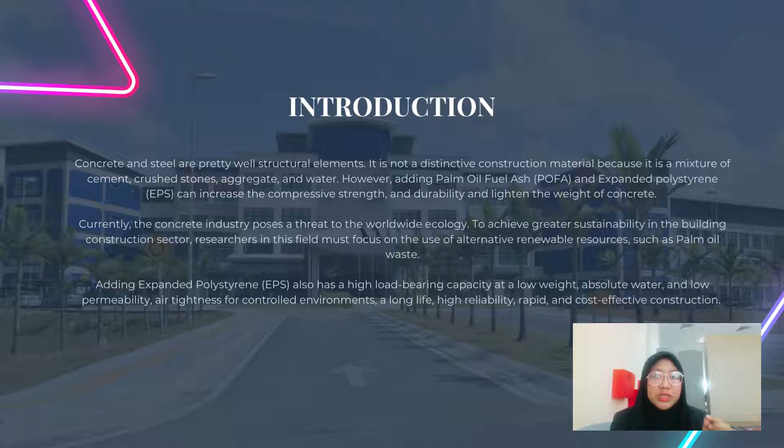Alright, for the introduction, first, concrete and steel are a pretty well structural elements. It is not a distinctive construction material because it is a mixture of cement, crushed stone, aggregate, and water. However, adding palm oil fuel ash POFA and expanded polystyrene EPS can increase the compressive strength and durability and lighten the weight of the concrete.

Currently, the concrete industry poses a threat to the worldwide ecology. To achieve greater sustainability in the building construction sector, researchers in this field must focus on the use of alternative renewable resources, such as palm oil waste. And adding expanded polystyrene EPS also has a high load bearing capacity at a low weight, absolute water, and low permeability, air tightness for controlled environment, a long life, high reliability, rapid and cost-effective construction.

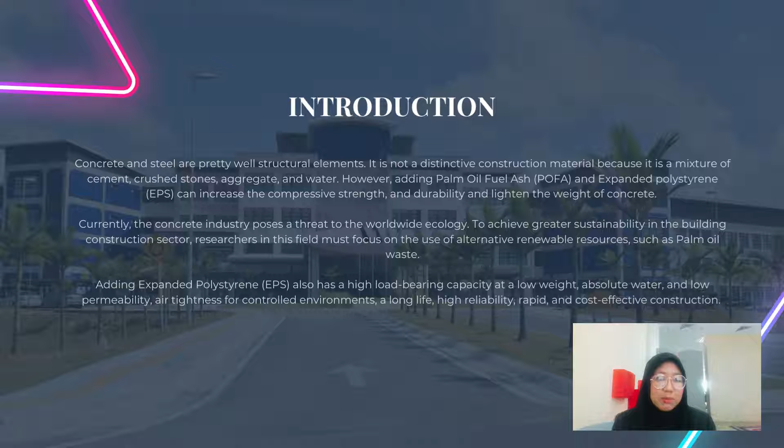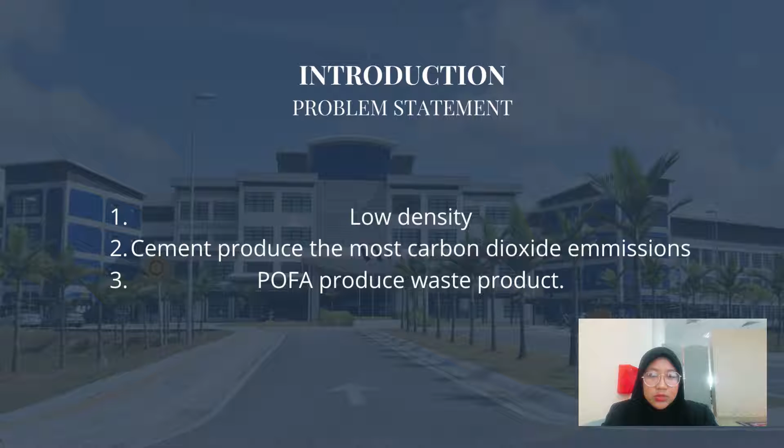And the third is POFA produces waste product. As we know, POFA is a waste product produced by biomass thermal power plants that burn oil palm leftovers to create energy. Because palm oil is one of the primary raw materials needed to make biodiesel, POFA production is expected to rise year after year. So the waste product of POFA will also rise.

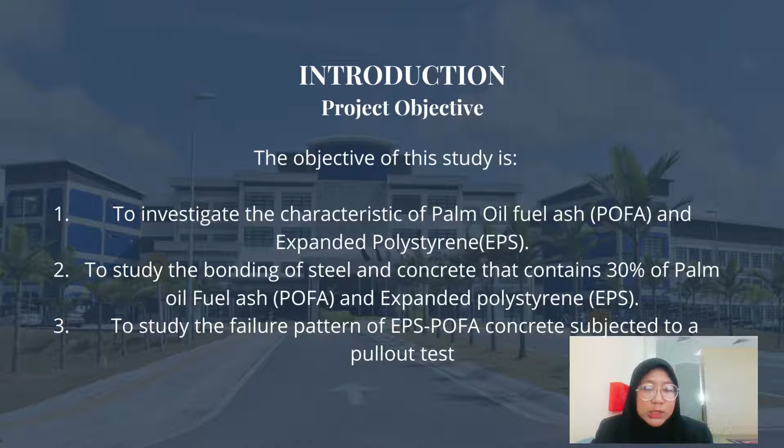Okay, for the scope of work, this project scope was limited to using the same type of cement grade, palm oil fuel ash POFA type, expanded polystyrene EPS type and size, and the same type of aggregate. It also investigates the characteristics of palm oil fuel ash POFA and expanded polystyrene EPS. The test done for this characteristic is X-ray diffraction analysis to determine the material crystallographic structure.

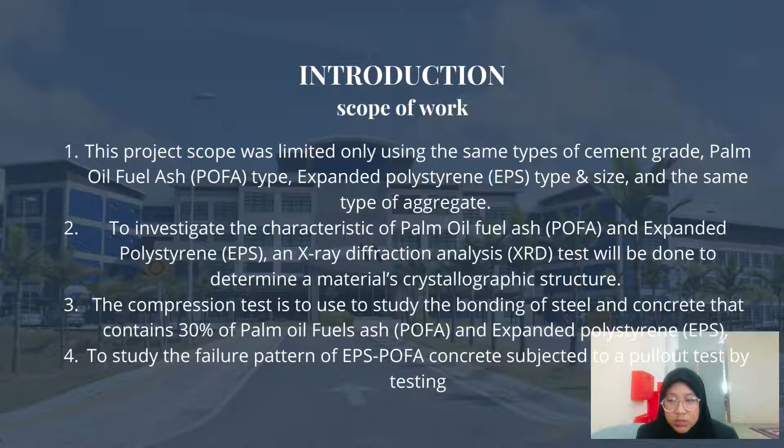And next, the compression test is used to study the bonding of steel and concrete that contains 30% of palm oil fuel ash POFA and expanded polystyrene EPS. And last is to study the failure pattern of EPS POFA concrete subjected to a pull-out test.

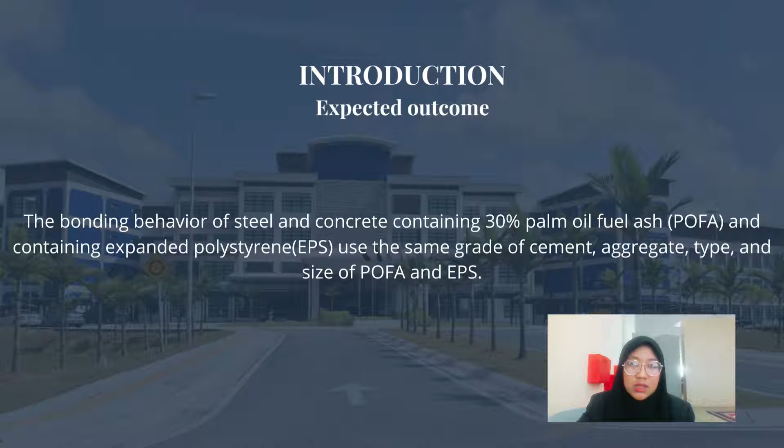Furthermore, the standard mixture of the concrete, such as cement, sand, aggregate, and water, was improved by adding POFA and EPS. By doing the experiment, the expectation is that the bonding behavior of steel and concrete can gain compressive strength and durability and lighten the weight of the concrete.

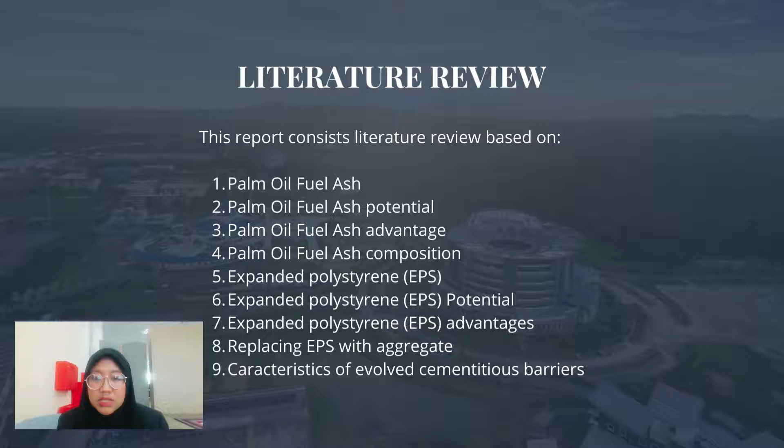The literature review in this report is based on palm oil fuel ash potential, palm oil fuel ash advantage, palm oil fuel ash composition, expanded polystyrene EPS, expanded polystyrene EPS potential, expanded polystyrene EPS advantage, replacing aggregate with EPS, and characteristics of the evolved cementitious barriers.

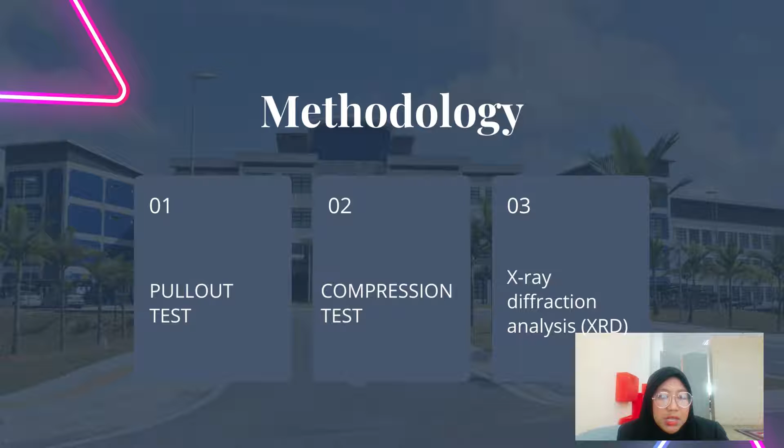Alright, for the methodology, we have three tests that will be done: pull-out test, compression test, and X-ray diffraction analysis, known as XRD. For the methodology flowchart, first I identify the problem. Then I find the literature review that's suitable for the problem, and start to prepare the material.

The materials that I use in this methodology are ordinary Portland cement grade 25, fine aggregate and coarse aggregate, POFA and EPS. And then start to prepare the samples. The prepared samples have two types: concrete mixed with 30% POFA and EPS, and concrete mixed with 0% POFA and EPS.

So we divide into 48 cubes and rectangular specimens for the compression cube test and pull-out test. And we have also done the XRD test, which is for the POFA and expanded polystyrene EPS.

Then after we get the data, we will analyze whether this is done successfully or not. If it's not done successfully, we will repeat it again in the sample preparation. And if it's successful, we will compare the sample without 30% POFA and with 30% POFA, and we start making the conclusion and the end.

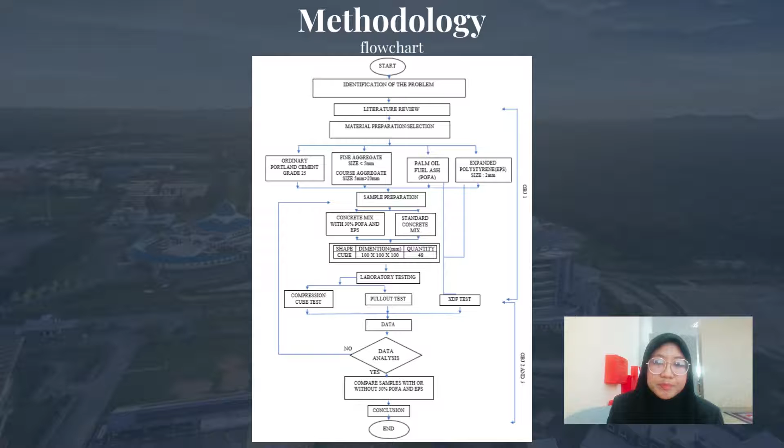Okay, for the sample preparation, in this experiment we'll use 48 samples which have the same cube shape and the same dimension for each concrete block. First, for the compression test, we'll use the cube test. The cube test is 100 mm cube. And for the pull-out test, we'll use the rectangular size, which is 500 mm times 250 mm times 250 mm.

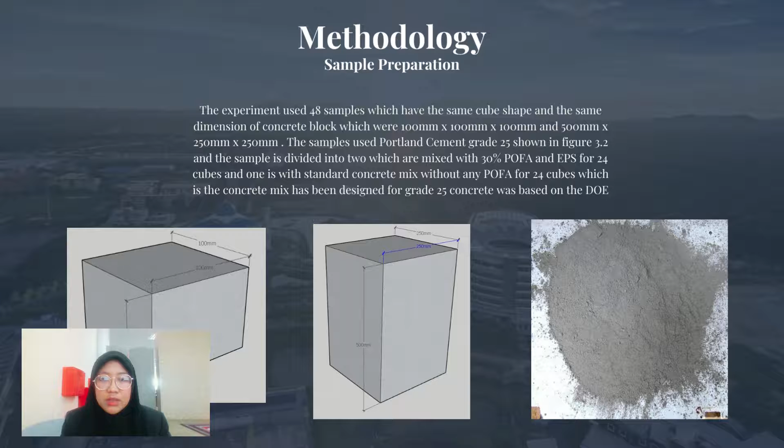The sample used Portland cement grade 25 as shown in this picture, and the sample is divided into two: one mix with 30% POFA combined with EPS, and one mix with 0% POFA that also has EPS, for 24 cubes, which is the standard concrete mix without POFA, for 24 cubes. The concrete mix has been designed for grade 25 concrete based on the DOE.

For the methodology sample preparation, the concrete mixer was used as the medium for preparing the concrete mix design, and the concrete was tested using the cube test for the compression test, and the curing process has undergone 7 days and 28 days to get the result. As we've shown, the total is 24. This is for the compression test.

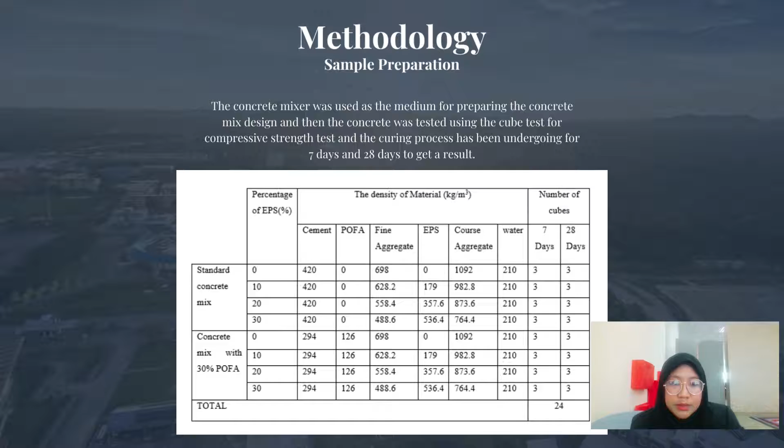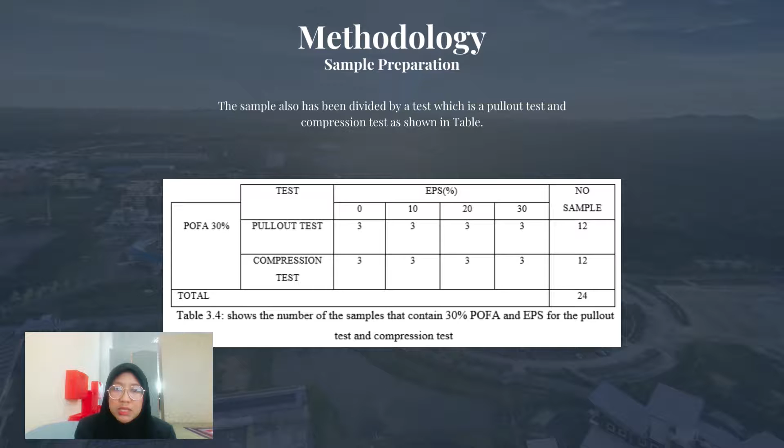For the methodology sample preparation, it is divided by the test, which is the pull-out test and the compression test shown in the table. Shown in the table is the POFA with 30% POFA, and EPS from 0% till 30% EPS, and the number of each sample is 12 samples, and if you total the pull-out test and compression test, it will be 24 samples.

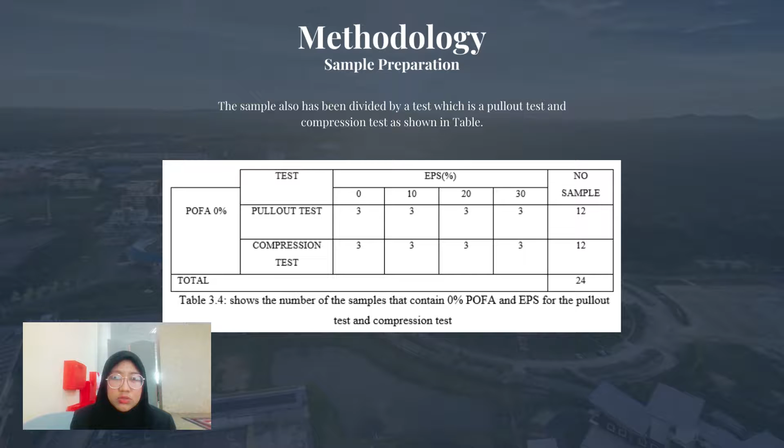And the samples have also been divided by test, pull-out test and compression test, but the difference is the POFA is 0%. And the same for EPS, also 0% till 30%, and the number of samples is also the same. For the pull-out test it is 12 samples, and compression is also 12 samples. So the total is 24 samples.

Okay, for the sample preparation, the tensile strength of each sample of the concrete block will be determined using the universal testing machine, UTM. As indicated in this figure, the concrete block has been investigated by observing it while being tested, and the concrete block will be recorded by the camera for future observation and reference for data analysis while gathering the tensile strength result for each block.

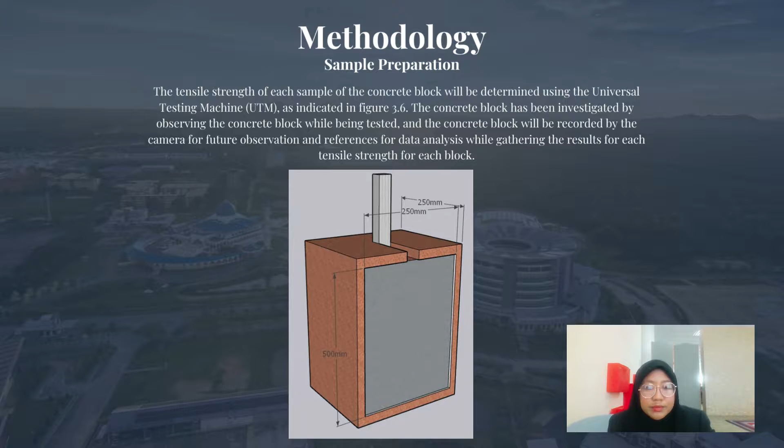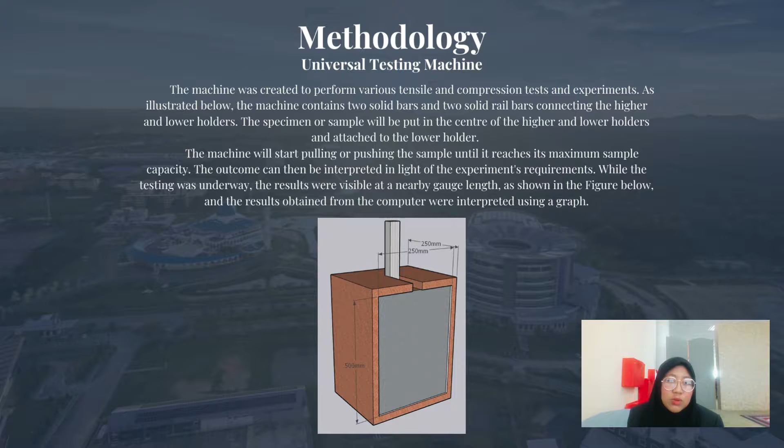We were using the universal testing machine, which was created to perform various tensile and compression tests and experiments. As illustrated below, the machine contains two solid bars and two solid rail bars connecting the higher and lower holder. The specimen will be put in the center of the higher and lower holder and attached to the lower holder. The machine will start pulling or pushing the sample until it reaches its maximum capacity. The outcome can be interpreted in light of the experiment's requirement. While the testing was underway, the results were visible at the nearby gauge length as shown in the figure below, and the results obtained from the computer were interpreted using the graph.

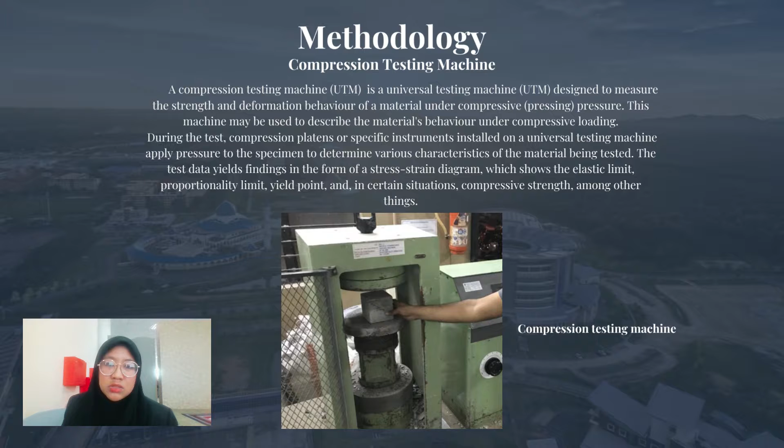Then we also used the compression testing machine. UTM is a universal testing machine designed to measure the strength and deformation behavior of a material under compression pressure. This machine may be used to describe the material behavior under compressive load. During this test, a compression platens or specific instrument installed on the universal testing machine applies pressure to the specimen to determine various characteristics of the material being tested. The test data yields findings in the form of the stress-strain diagram, which shows the elastic limit, proportionality limit, yield point, and in certain situations, compressive strength, among other things.

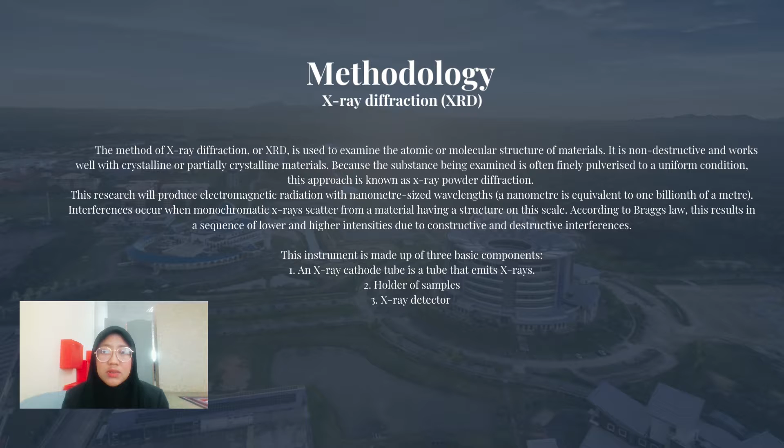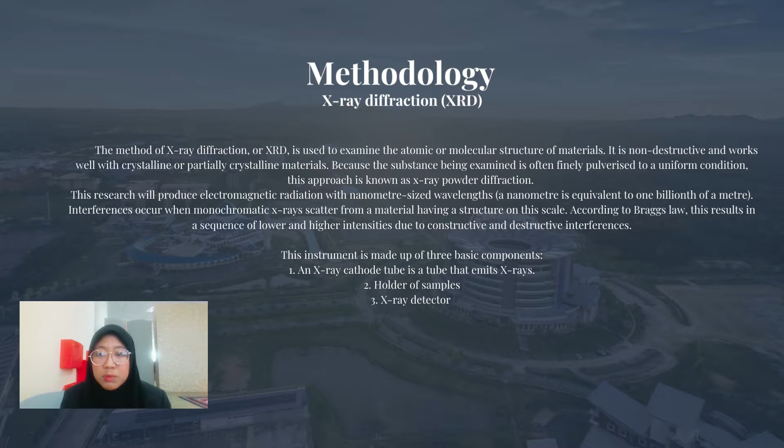The method of X-ray diffraction, or XRD, is used to examine the atomic or molecular structure of a material. It is non-destructive and works well with crystalline or partially crystalline material because the substance being examined is often finely pulverized to a uniform condition. This approach is known as X-ray powder diffraction. For this testing, data was collected after each sample was tested and documented. Results for all sorts of samples were gathered and recorded in order to analyze the data acquired from the test performed. The results were analyzed to see if the objectives were met or not.

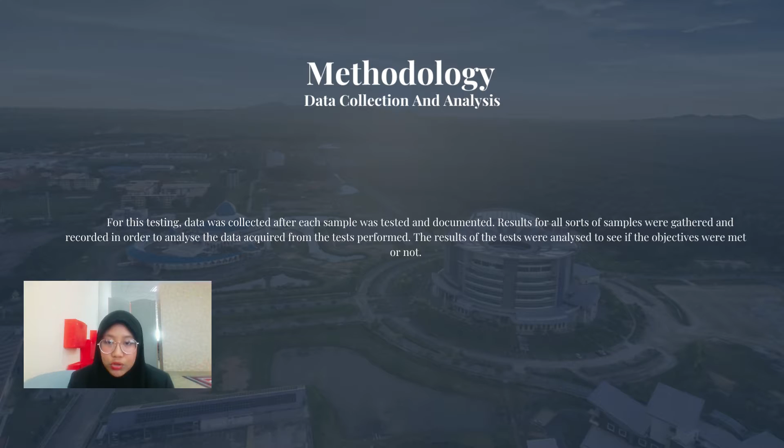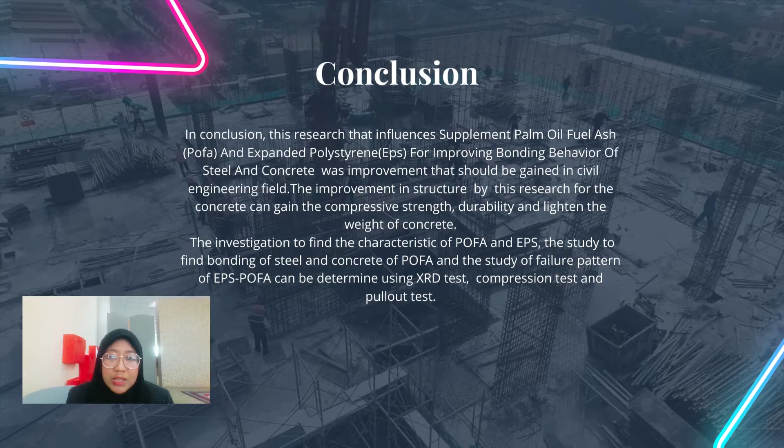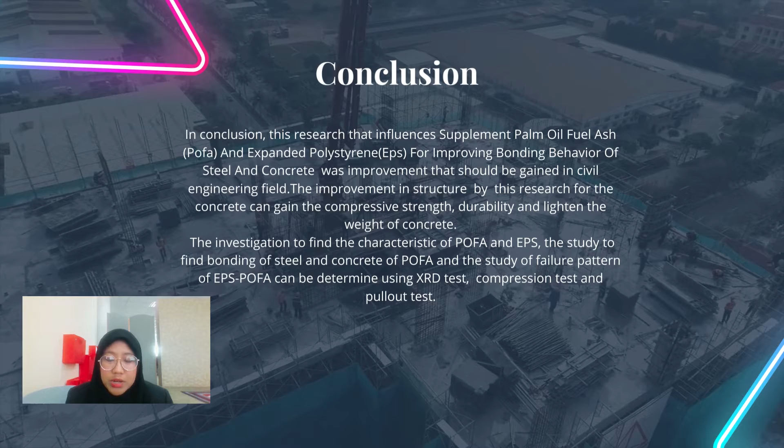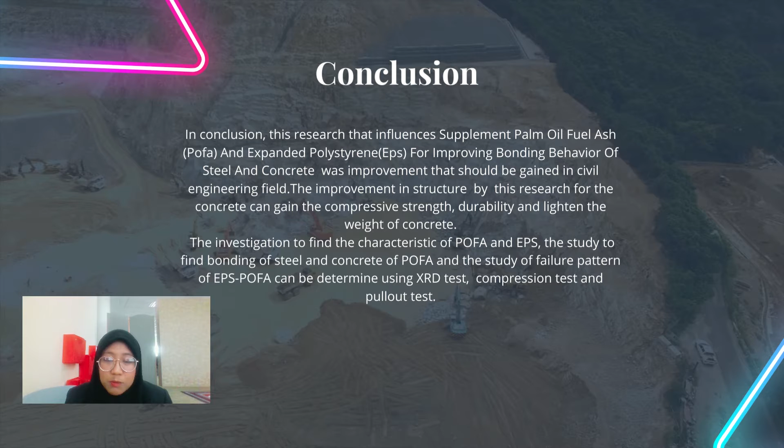In conclusion, the research on the influence of supplementing palm oil fuel ash, POFA, and expanded polystyrene, EPS, for improving the bonding behavior of steel and concrete is an improvement that should be gained in the civil engineering field. The improvement by this research can increase the compressive strength and durability of concrete and lighten its weight. The investigation finds the characteristics of POFA and EPS, the bonding of steel with POFA and EPS, and the failure pattern of EPS and POFA, determined using the XRD test, compression test, and pull-out test.

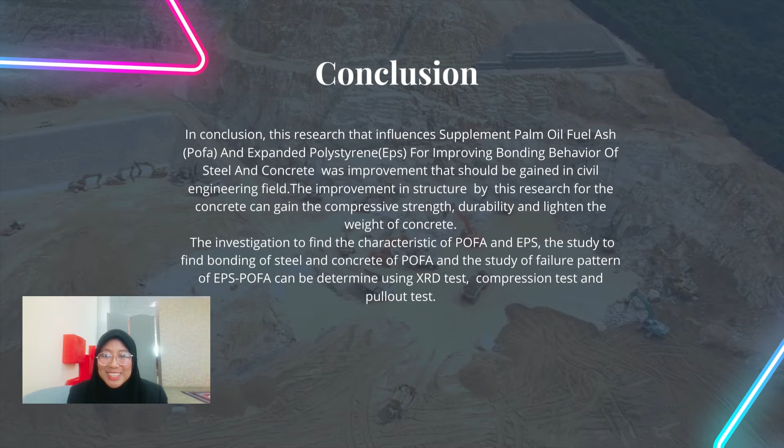In conclusion, research on the influence of supplementing palm oil fuel ash, POFA, and expanded polystyrene, EPS, for improving